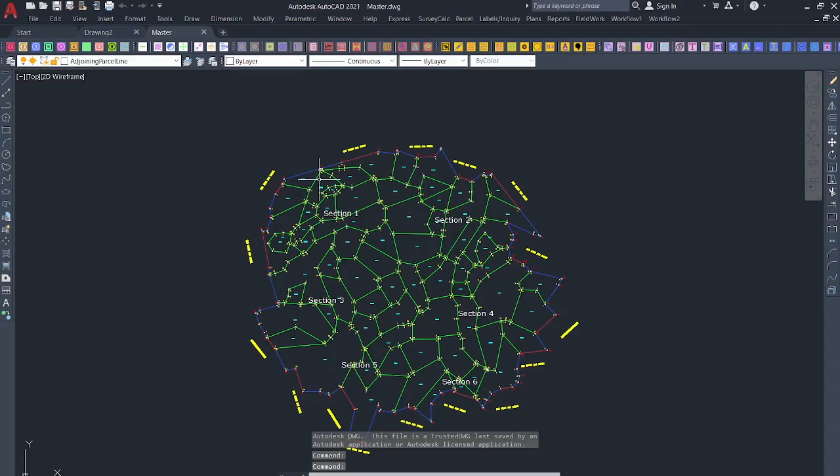Ngayon, mag-create tayo ng demo para sa isang feature ng SurveyCalc, yung split plan. Dito sa desktop, may isang folder ako na split plan. Sa loob, mayroon isang file, yung master DWG. So we'll open that file. Ito yung map power plan. Medyo malaki ito, so we'll create multiple plans out of this drawing.

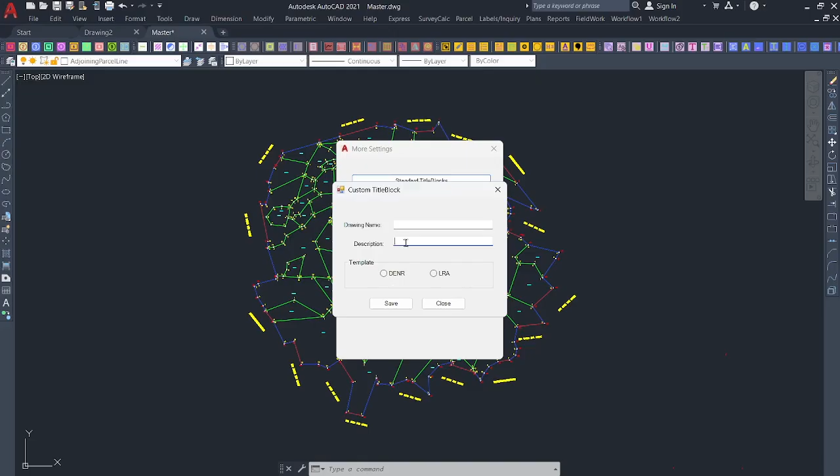Preferences, so select tayo ng DENR for now. Then select natin yung model at try natin i-insert yung title block muna. Ito yung title block ng lote natin. So currently, 1 to 4,000.

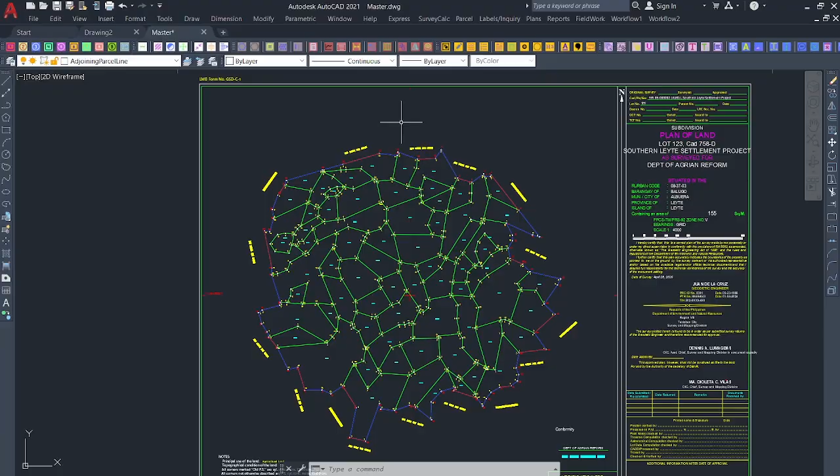So what if gagawa tayo ng drawing na 1 to 2,000 lang? Kasi pag pinaplot natin to, hindi na natin nakikita yung mga corner numbers, yung lot numbers, or pag i-standardize natin. For example, i-standardize ko yung mga annotation like corner numbers, so I can just update that plan.

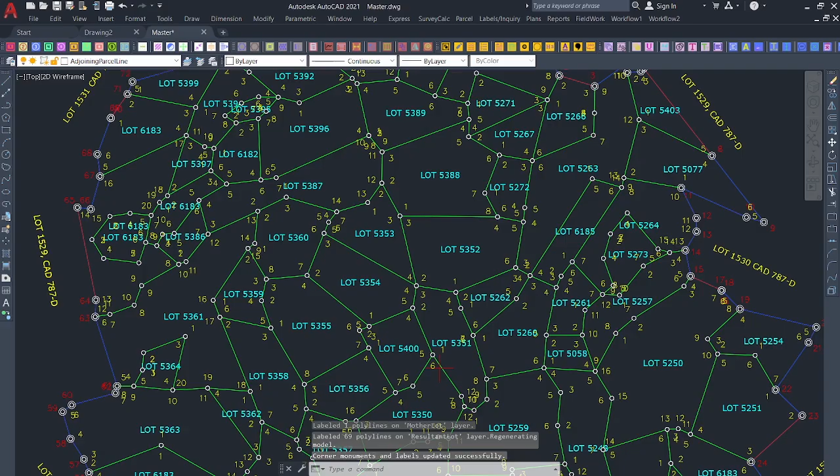Then tingnan natin kung gaano kalalaki. So see, malaki yung font or yung text height. So medyo clutter naman sa drawings natin. Like this one, nag-overlap na yung mga text. So the best thing to do is to split this drawing into a larger scale, like 1 to 2,000.

So how will we do that in SurveyCalc? Sa SurveyCalc, mayroon tayong I think 4 steps. First, we'll create a section guide, then we'll create the split boundary, then we generate the plans, then we will clean up all the plans.

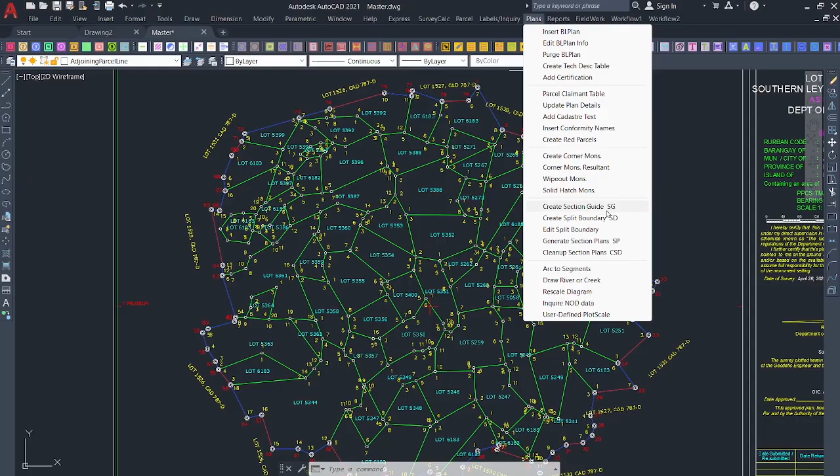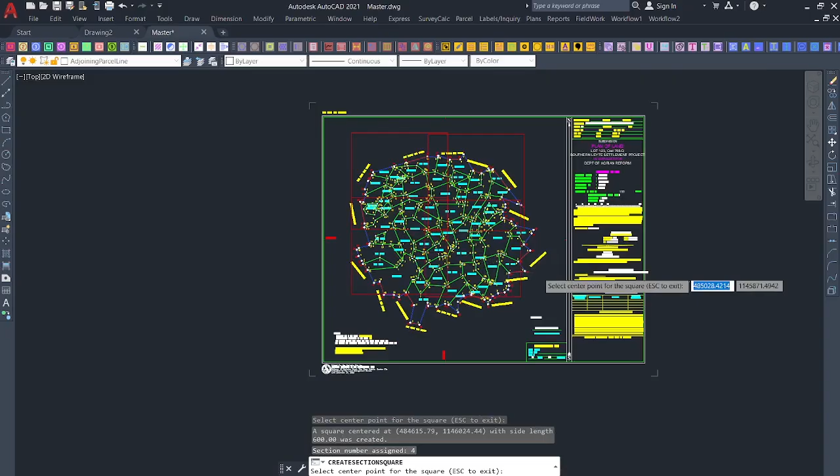So let's see, 2,000. Okay, so just click here, off mo natin yung snap. Click, so yan yung gusto mo, click mo na yan. Let's try 4. Okay, so yan. Then press enter or escape.

Then we'll now create the split boundaries. Dito, Plans, SD, or type mo sa keyboard na SD, then enter, then it will create now the boundaries. Kita mo dito medyo hindi siya nasali. Alam mo na hindi nasali yung portion kasi hindi siya na-hatch. So bakit hindi siya nasali?

Kasi itong lote na to, pag ito na sheet, hindi siya pasok, di ba? Kung ito naman sa section 1, hindi siya fully pasok. So kailangan natin na ipasok. So you have 2 options, either ipasok mo siya sa section 1 or sa section 2. So I'll choose to put that into section 1 kasi maluwag pa dito. I just move the section guide. Okay, pasok na siya.

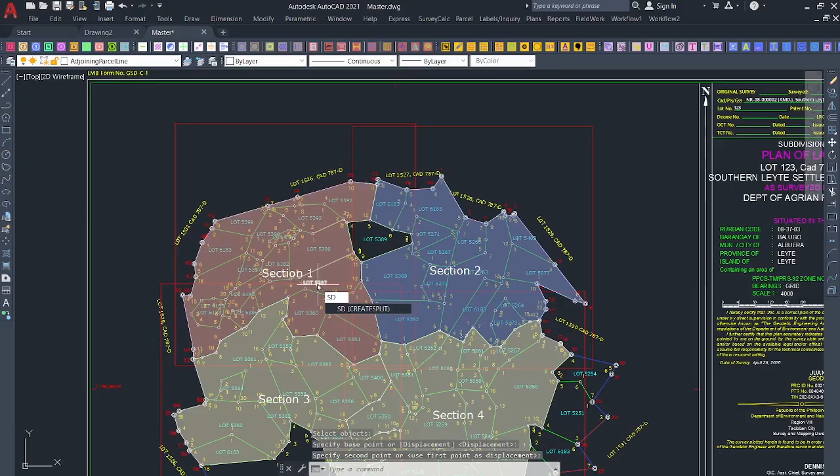Dito din pasok din yung iba. Then I'll generate again, I'll type SD. Okay, so now dito makikita mo dito sa iba, sa baba. Okay, so maraming hindi pumapasok. Ito, hindi siya napasok kasi hindi siya fully napasok sa section guide.

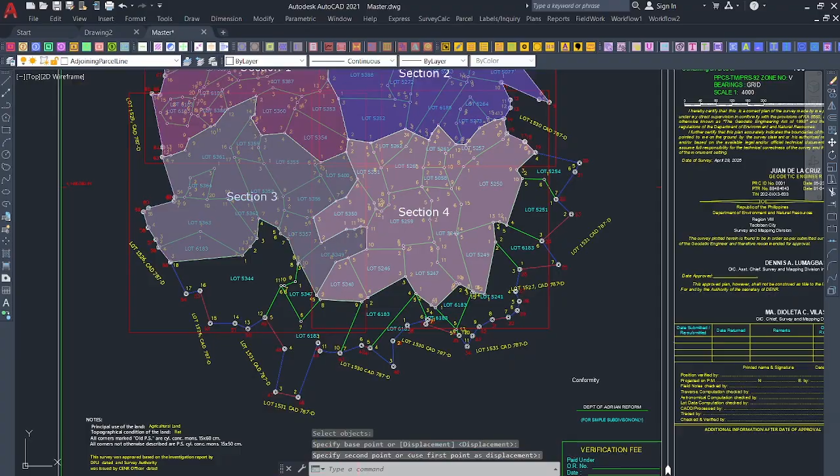So pwede natin ibaba, baba natin to. Okay, yan, check also dito sa taas kung pasok ba. Okay, type is D, okay pasok mo siya. So ito naman, hindi siya napasok kasi hindi siya fully pasok. So pwede natin i-move to the left or to the right. So to the left, then type is D.

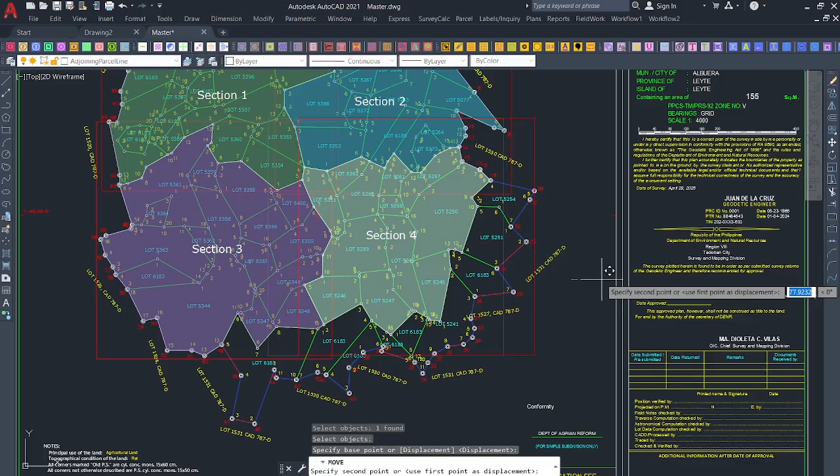Okay, so ito na, dito naman yung section 4. Hindi siya napasok dito, pwede natin ito i-move to the right kasi malaking space naman ito sa kabila. Try natin yan, okay, then we'll try this D. Yun, so ito, we need to add more sections.

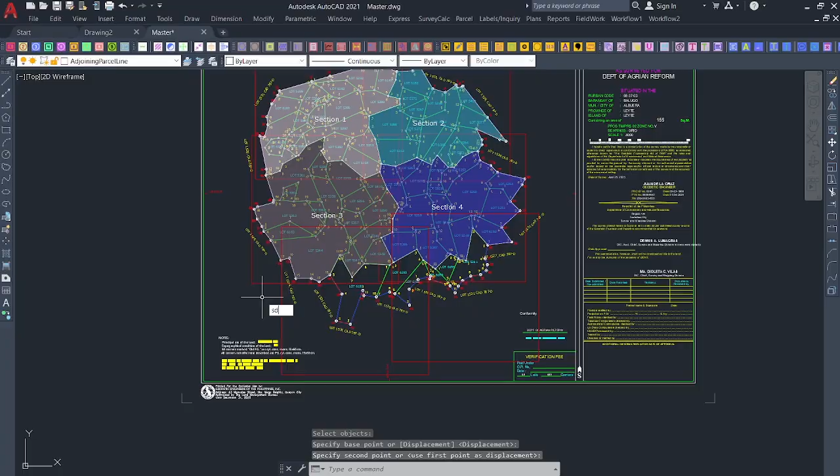So we'll go, type is G, then 2,000 pa rin, enter. Click natin yan, saka dito siguro. Move natin, yan, taas para pasok siya. At pasok, up natin. Then type is D. Okay, so kita natin yung mga sections natin.

So that's just an example, kitang-kita mo siya kung saan yung mga boundaries niya. I will try to make this one section na, para 5 lang yung drawing natin. Okay, hindi pa, so parang okay, so dito sa taas.

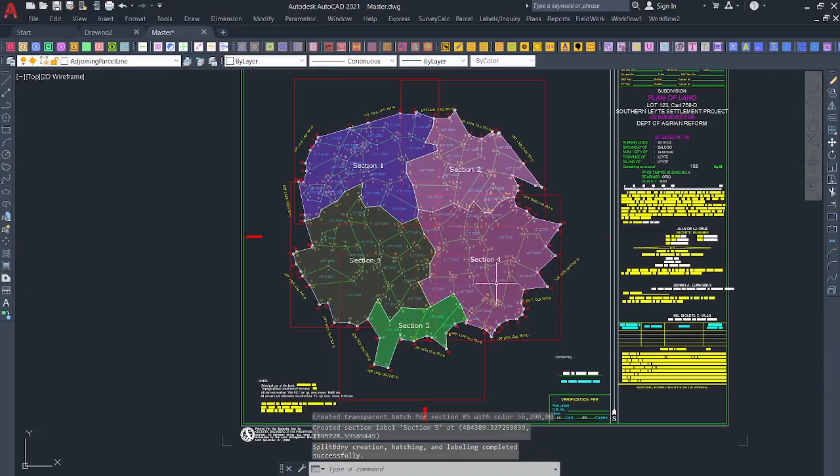Pwede natin 5 lang. So ito, try natin, we will remove this one. We'll bring this one down. Pasok ba? Okay, try natin, SD. Okay, so pwede kasya 5 lang. Okay, so that's how we create the section guide.

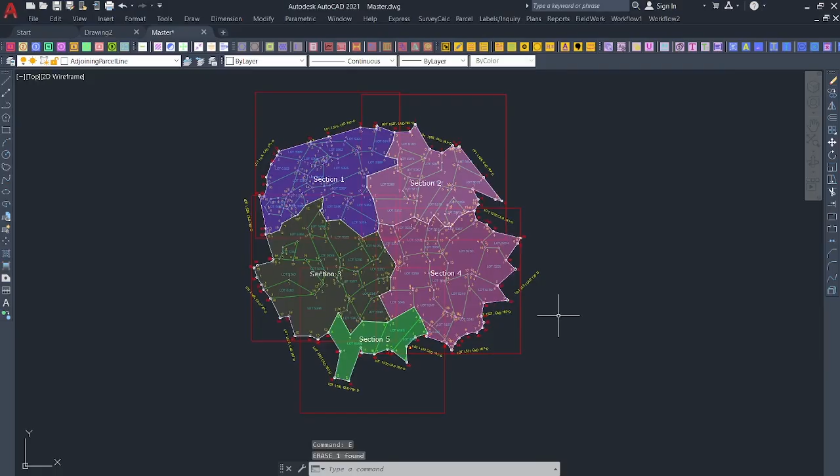Di ba, mabilis lang. Then save natin. Okay, so let's first erase this one, baka ma-export siya. So we go plans, generate section plans, we'll increase this one to 100. Okay, and we'll open the drawing.

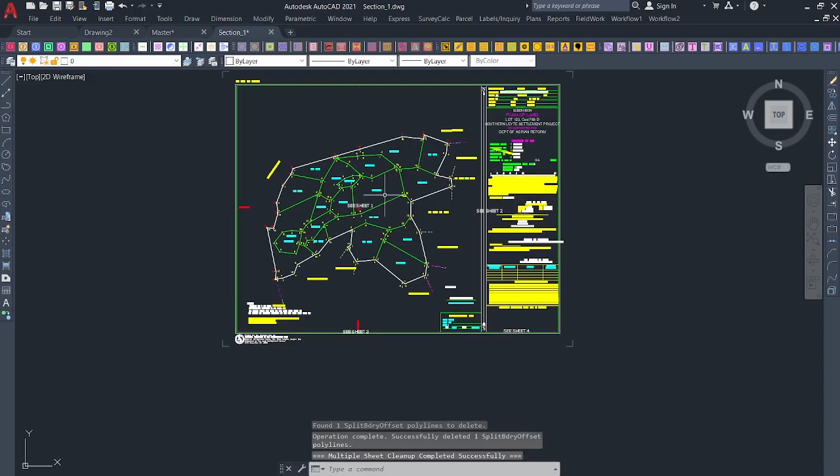Ito, so may section drawings na. Open, then we'll zoom extend. Medyo clutter yung drawings natin, so what we'll do is we'll do clean up plans, clean up section plans. So yun lang. Okay, so kita natin yung sheet 1, then this will be the sheet 2 here. And taas natin ito, so kita natin dito.

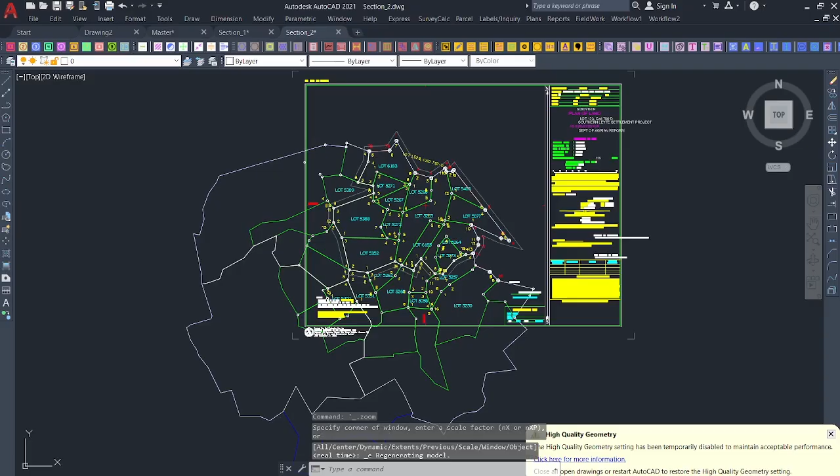2,000 yung scale niya, so just remove some of the text. Okay, so we'll open second drawing. So extend, or we can type CSD to clean up. Okay, so just erase this one. So these are the match lines, this one and this one.

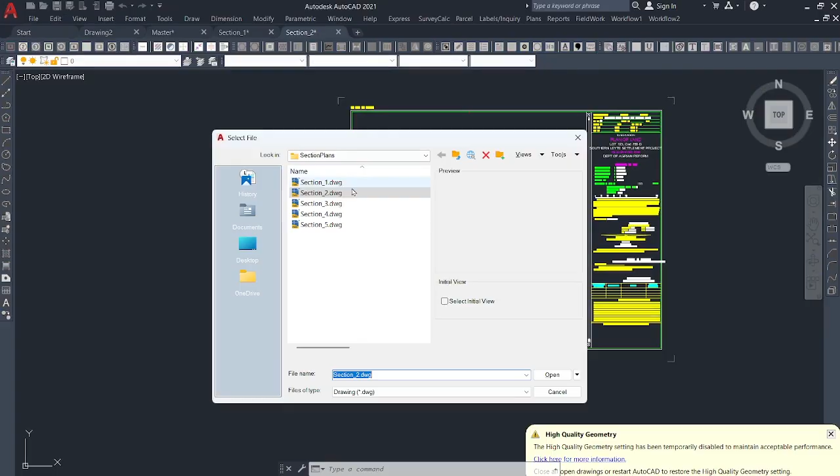Okay, so dito sa boundary na to. Dito yung sheet 4. Okay, so we'll do the same in all our drawings. CSD, then after clean up, you zoom extend.

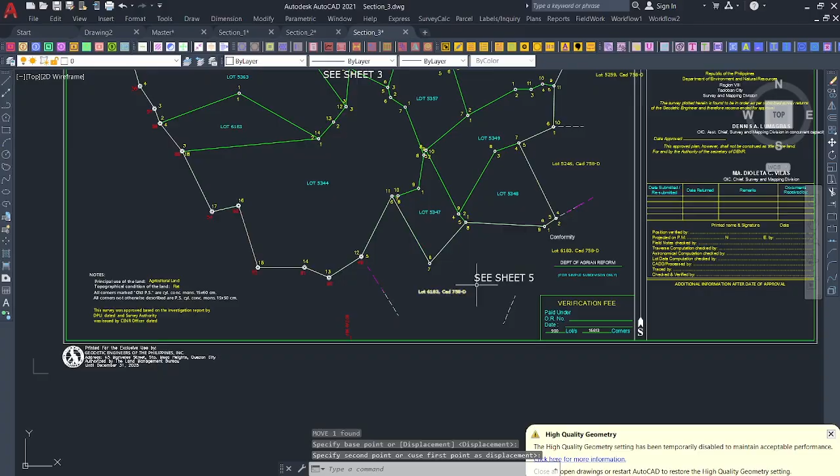Okay, then this is now your, here's the sheet 4, this one is sheet 4. Yeah, this one's sheet 5. So that's how we prepare our drawings using section plans.